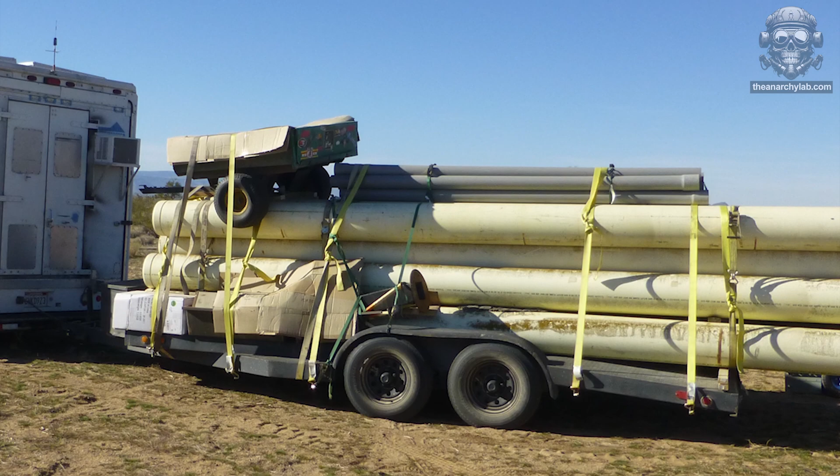Once upon a time, I bought a trailer. It was a good trailer, but despite its best efforts, it could not handle the demands I asked of it. We eventually decided to part ways because I knew I could never be faithful in this relationship that left me wanting. I wanted it all.

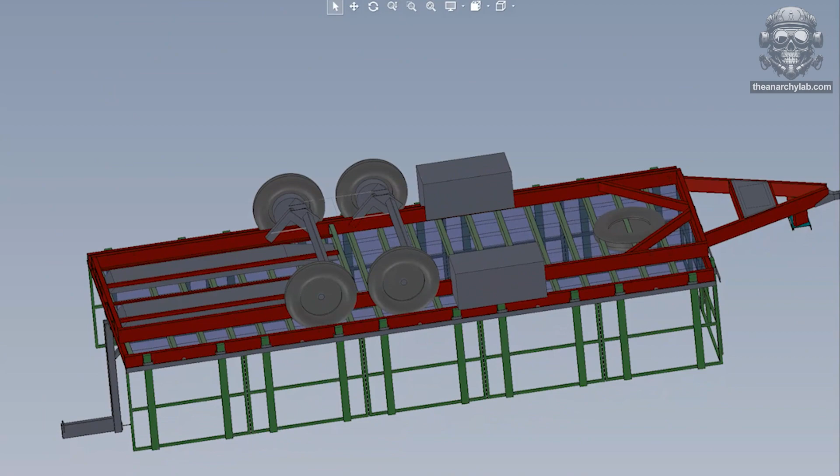I wasn't willing to compromise. I wanted a completely flat bed, 20 feet long, 8.5 feet wide, with removable sides. I needed pockets for chains, some long loading ramps, and a winch to fulfill my dreams. So I fired up SolidWorks and started down the path to making it a reality.

In my excitement, this design had a fatal flaw. This is not one of those forgetting-your-anniversary types, but more like forgetting to apply your parking brake when next to a cliff. So, for 10 points, see if you can spot it, and we'll reveal the fix at the end.

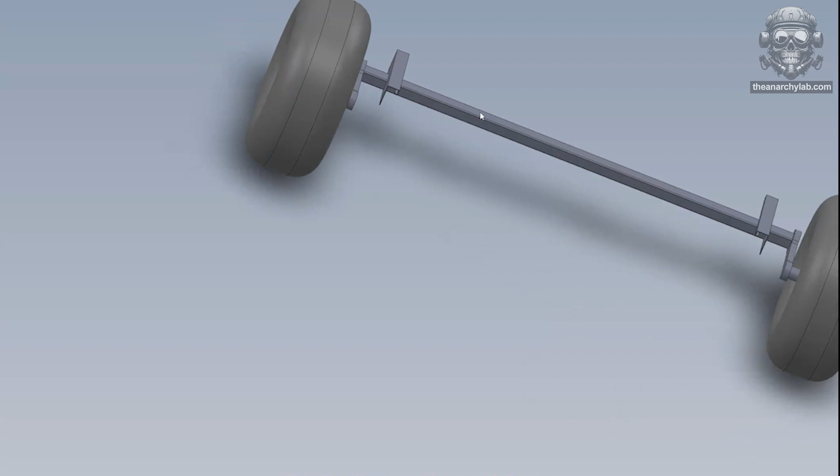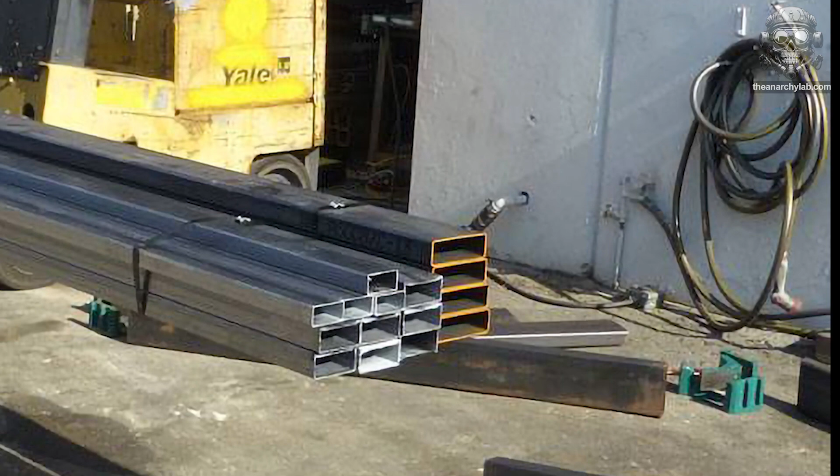With nothing but a vision and a stack of metal, I set off on my journey. Was what I wanted even possible? Was I being unrealistic? After all, love is blind, and I had a welder.

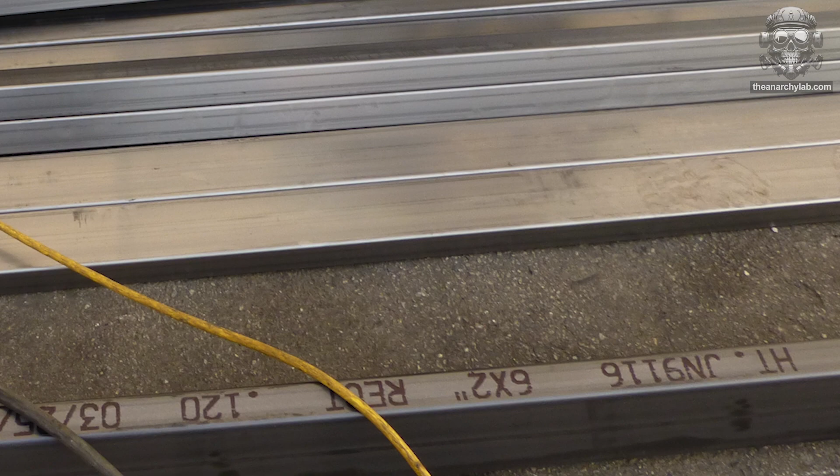As I looked at the pile of metal before me, I felt great anxiety about the task ahead. However, I was determined and was not willing to let anything stand in my way. As I collected my thoughts and logic took hold, I decided to look at my prints that would guide me on my journey. Creativity would have to take a backseat, as engineering would be my guide.

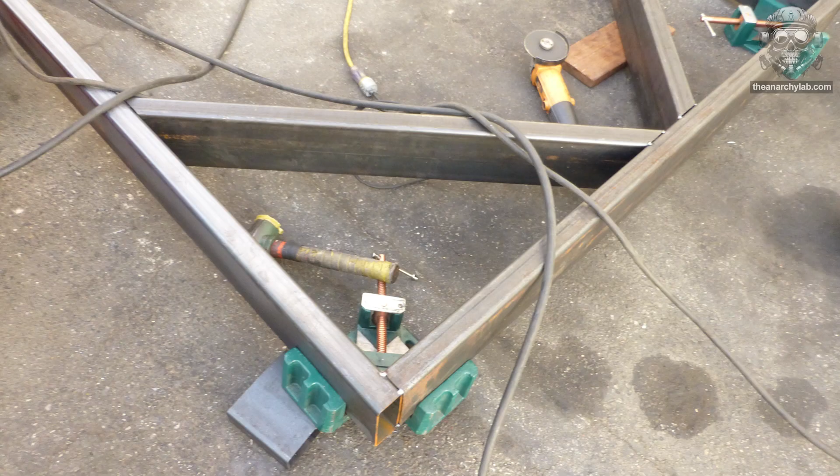As rigid and uncompromising as my 4th grade teacher, the 90-degree angle clamp was unwilling to bend. However, its wisdom, while simple in concept, was pure genius.

I insisted on installing 8-foot ramps that would be hidden under the trailer. However, the ramps insisted that I give them a home and the love they deserved. I enlisted the capabilities of my plasma cutter to create 2 holes that would look deep into the soul of the trailer. I knew, in doing my part, the ramps would always feel secure.

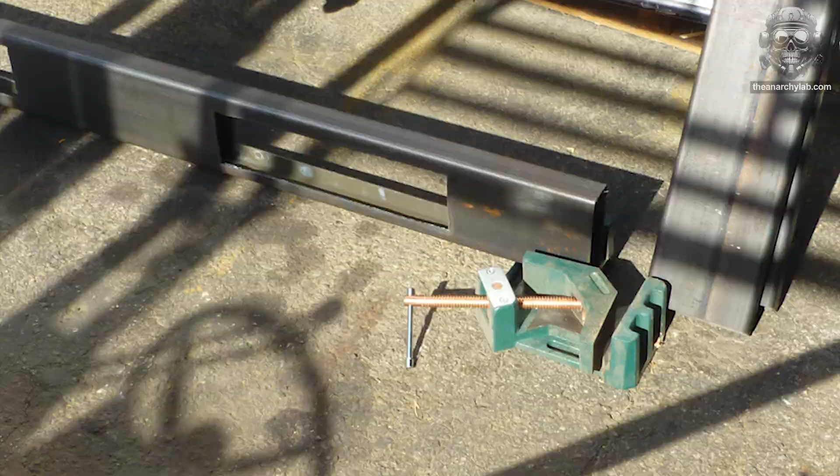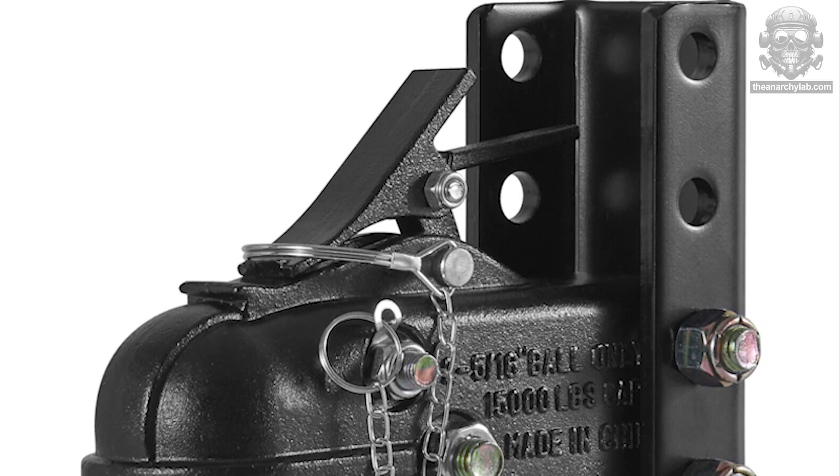I welded a standard 2 5/16 ball coupler to the front frame members. While I had the greatest of intentions, I would find out later that this positioned the tongue of the trailer too high. I would be forced to sacrifice this attachment part and begrudgingly replace it with an adjustable mount. I did the best I could, but ultimately had to accept failure, and knew its fate was sealed as I eventually lopped it in half and replaced it with a better coupler. They can't all be winners.

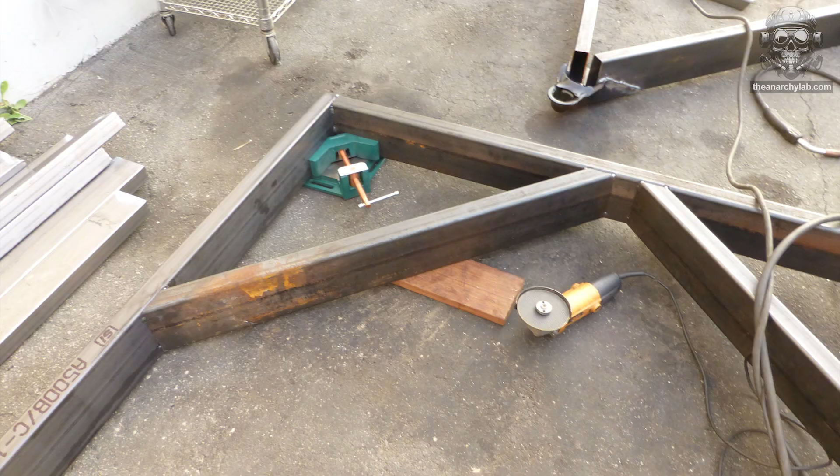While I was nowhere close to completion, my journey was starting to take shape. We call this shape a triangle. Minutes became hours, and hours became days. I refused to let my emotions get the best of me and continued to struggle towards the finish line.

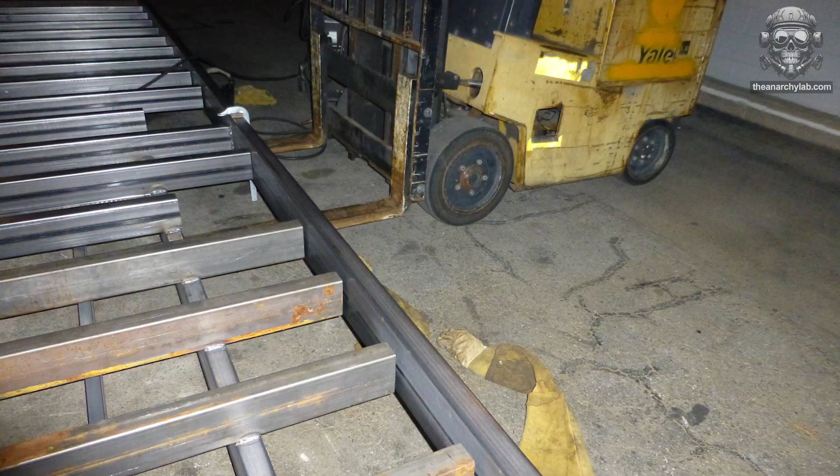With the base structure in place, it was time to run the cross members. In an attempt to keep the trailer light and nimble, yet strong as an ox, I used 1/16-inch wall box steel, 4 inches by 2 inches wide. I placed these on 12-inch centers, and I knew the 2x12 planks that would form the bed of the trailer would allow the cross members to share the burden I would ask of them. They would prosper, never bow, and would have the strength of 100 men.

As I put the 2x6 by 1/8 wall tubing on the sides of the trailer, I knew the cross members would feel united in their strength. With the welding of the main structure complete and the ramp slides in place, there was no going back.

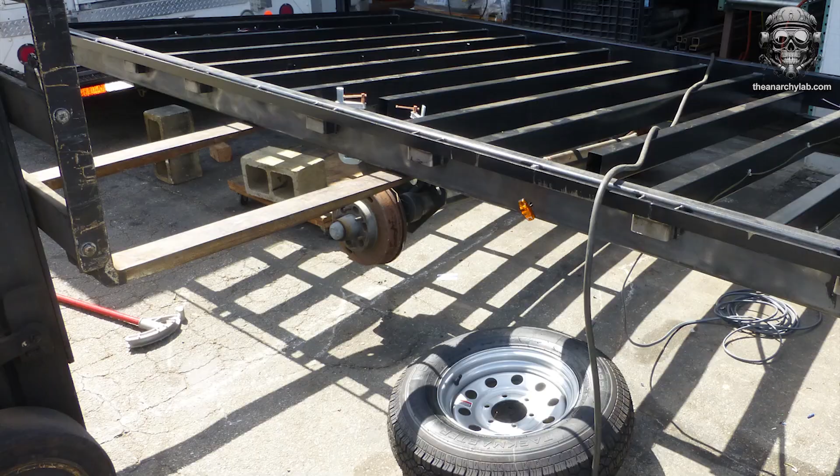The trailer, now wanting of axles, it was my responsibility to procure such an item. Luckily, I was able to find some 5,000-pound torsion axles at auction that made me look like a hero, while being a cheap ass. Axles positioned in place, we now had a foundation to build the future on.

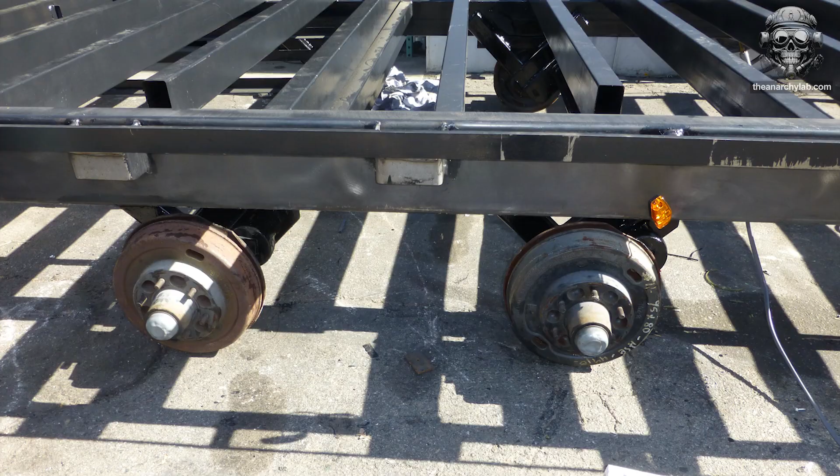These axles were odd, but they had a character of their own. They were designed for some other application, with some other worldly desire that I did not quite comprehend. I had to mount them at 45-degree angles to make them fit properly. They seemed bizarre to me, but have proven to have fortitude and strength, and have never floundered.

These axles were wide, as if trying to reach the extents of the known world. However, I had different plans, and would force them to be narrower to fit the frame rails I created for them.

They eventually decided to submit, as I cut 8 inches out of their center, inserted a sleeve, and welded them back together. It was a sacrifice they were willing to make, because they're axles, and they're incapable of speaking.

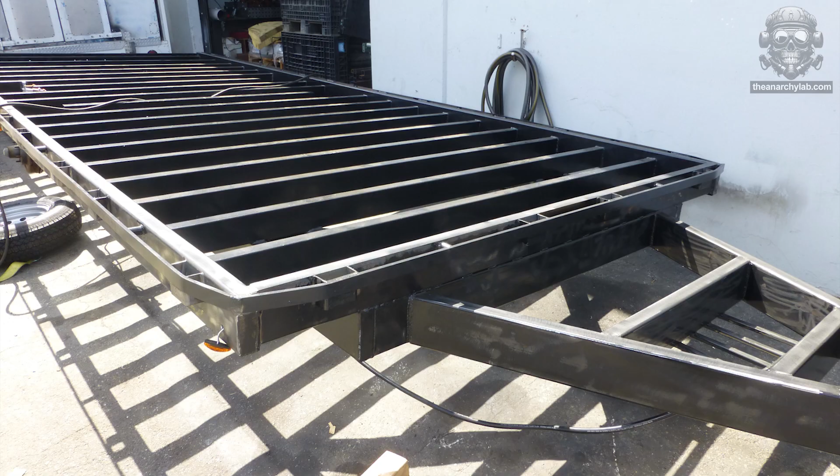Even with the great strength that steel can offer, it'll never be able to defeat rust. The fierce iron moths are relentless and uncompromising. We decided that a heavy coat of paint was the only way to secure the kingdom.

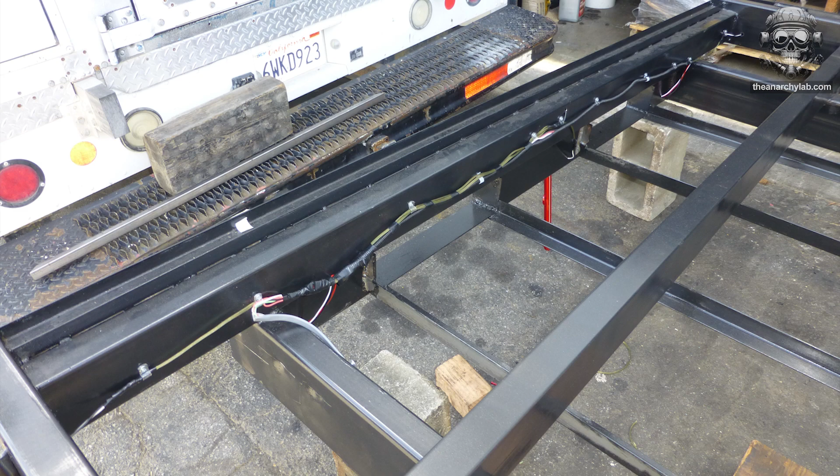As we're now well into our journey, it was painfully clear that the trailer needed to be wired. Given its length and width, this meant 3 lights along each side and 3 across the back, with electronic brakes on all 4 hubs.

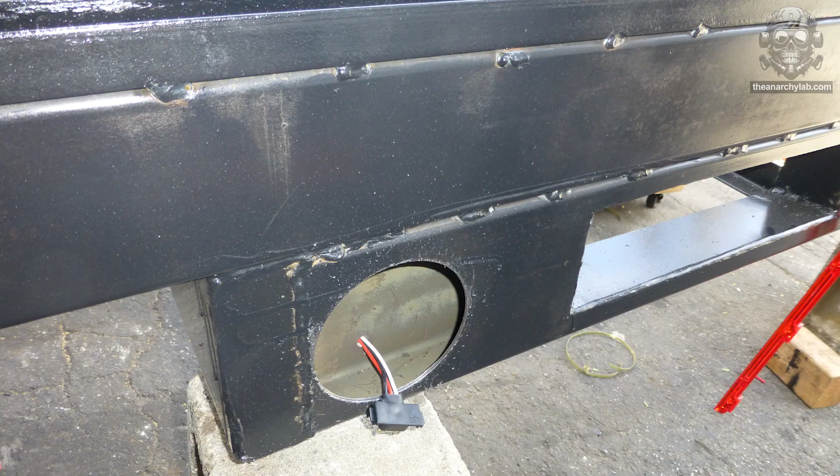This may be a bit much for some people to handle, but it was a necessary task that can't be ignored. A mighty hole saw had to be awoken from its slumber to carve out a home for the LED lights. A lowly 2-axle trailer was asked to step into the shoes of giants to deliver the 2x12 planking that would provide the supporting structure required.

A little bit lost and bewildered, the boards quickly discovered their purpose in life and were ready to be assimilated into their responsibilities. With a new coat of armor that only Bedliner can provide, the boards have the confidence they need for any battle they would see.

With lights in place and reflective tape glimmering, the trailer made a statement that could clearly be seen. With the paint now dry and the boards comfortable in their homes, they were unexpectedly frightened as they were screwed to the frame. After dealing with the pain and fear, they accepted the new utility that they now experienced.

Unexpected to the trailer, it was soon adorned with a new steel cage as if a crown had been placed on its head. A young prince had taken the throne.

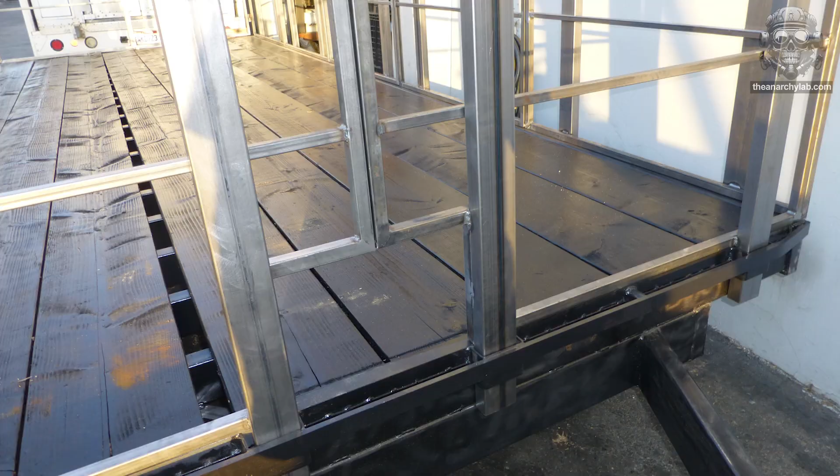As if not completely ready to commit to its new bondage, it swung open its rear door to show its independence and rebellion. Before anything could get away and become unruly, all the sides were pinned together in a sign of unity.

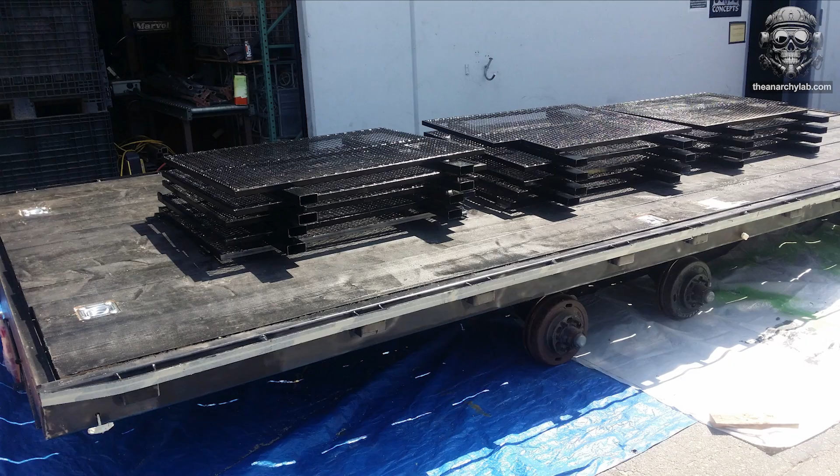With the trailer secure but the sides lacking paint, they were uniformly stacked and coated with a majestic gloss black. Proud enough to stand on their own, the sides finished their drying against the fence for all to see. Back in place, as if they had never left, the kingdom was once again whole.

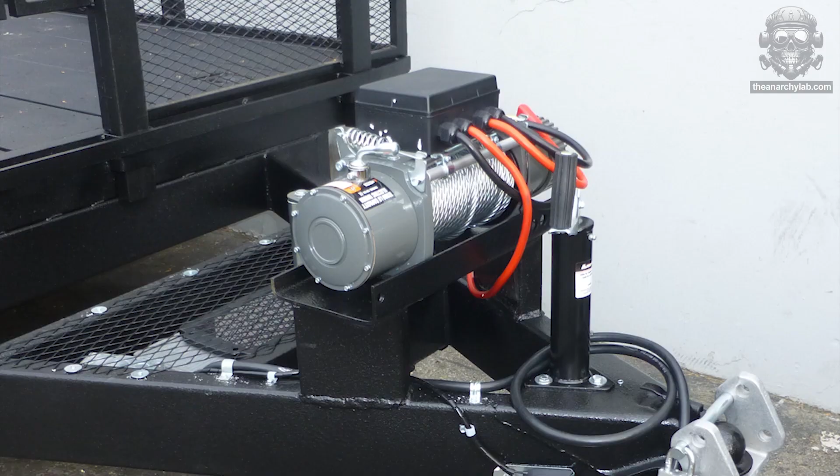Fitted with a new set of tires, it was ready to conquer the foreign lands. Mounted with a winch, sporting an uncompromising steel cable, it was ready to battle against those not willing to come aboard. After some travels, the battles were heavy.

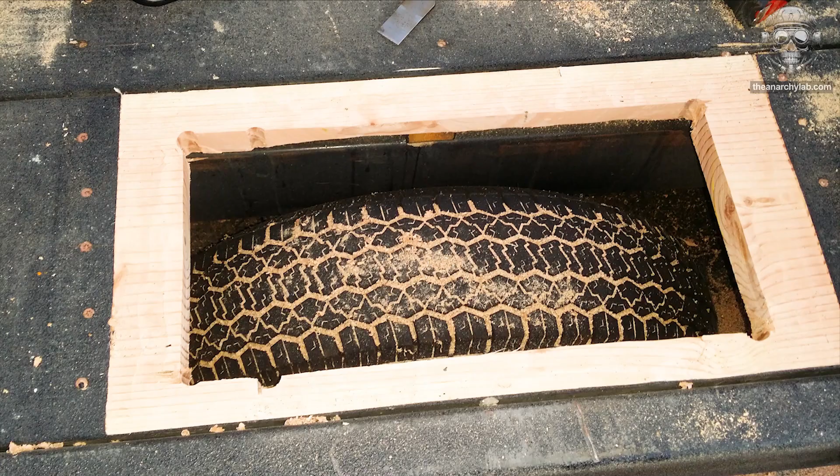It turned out that the 15-inch wheels were just not up to the task. After a blowout, it became apparent that the larger 16-inch wheels with heavier-duty tires would be a burden that the trailer would not willingly accommodate.

Unfortunately, the trailer was never trained to do these heavier tasks, and the frame rails and bed had to be modified to make them fit. As a reward for its perseverance, it was decorated with a piece of diamond plate, which will forever immortalize its efforts.

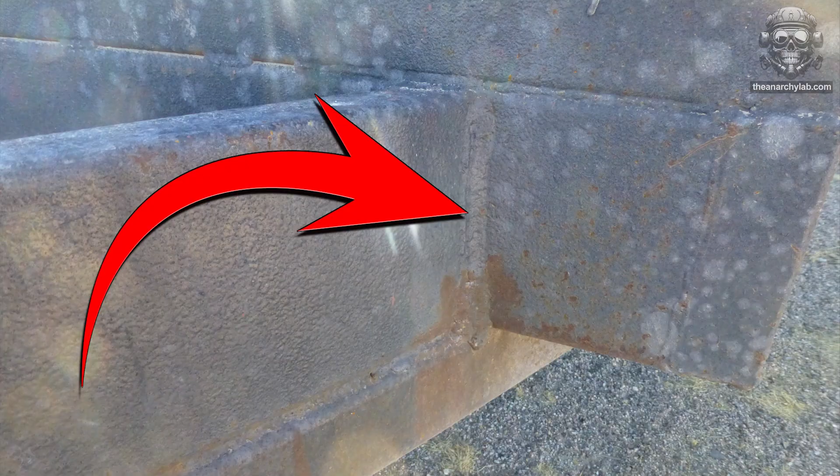So back to the fatal flaw I mentioned at the beginning. The tongue of the trailer was welded to the front of the bed, and it needed to cross through the front and attach to the side rails. In doing this, all the tongue weight was essentially being supported by an 1/8-inch thick piece of sheet steel.

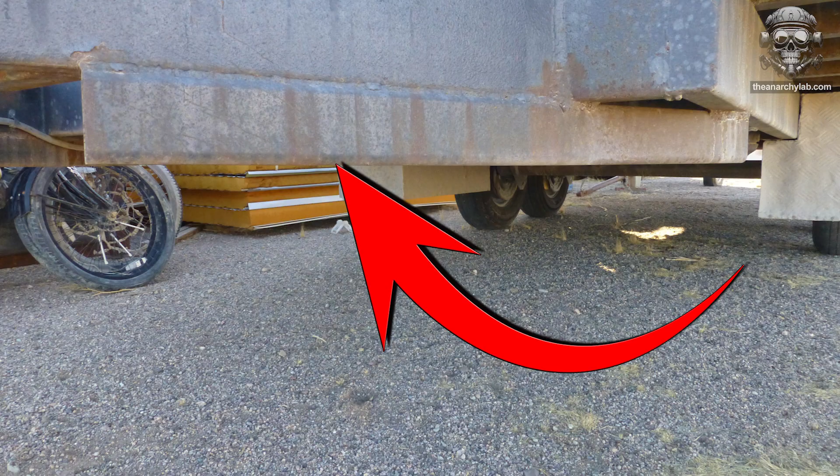After about an hour of traveling down the road, the entire trailer started to bend at the attachment point. To fix this, I welded a piece of 1/8-inch box steel to the bottom side of the frame to tie the tongue more rigidly to the rest of the trailer.

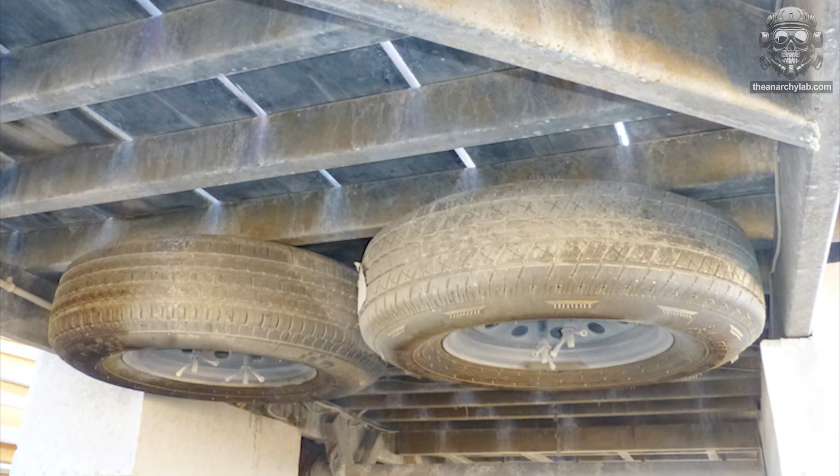This was a fun task because I had to weld it on the side of the road with a 110-volt welder running off the inverter in my truck. So I can thankfully say that after several years of severely overloading the trailer, it has never had a problem.

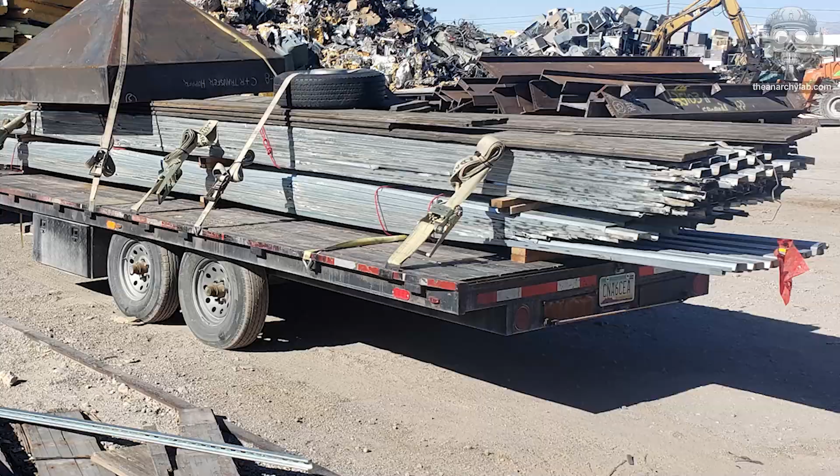So as the months turned into years and the battles became great, the trailer became the champion that could always be depended upon. After thousands of miles, it learned to love its servitude and became a trailer I could always depend on. We lived happily ever after.